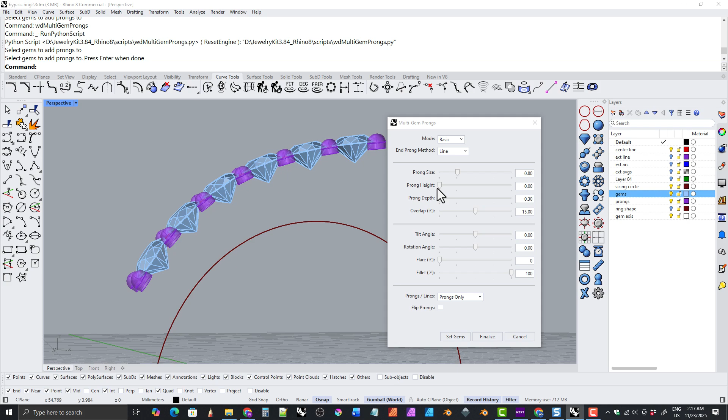Hi everyone, in this video I'm going to show you how to use the Multi-Gem Prong tool that comes with the jewelry kit that I make for Rhino. To open the Multi-Gem Prong tool, you click on its icon right here.

The Multi-Gem Prong window has four main sections. The top section, which has the mode and end prong method, which I'll go over later in the video. The second section, which I consider to have the main settings that you'll use almost every time that you use the tool. The third section, which has settings that you will probably use only occasionally.

And then the fourth section, which is kind of a miscellaneous section. It has settings like the prong/lines dropdown and the flip prongs checkbox. And we'll be going over all of these in the video, of course.

The Multi-Gem Prong tool has three modes: basic, tapered, and list. The only difference between these three modes is the size control. The basic mode has a single slider to control the prong sizes. The tapered mode has two sliders, one for the start size and one for the end size.

And then the list mode has a text box where you can enter a list of prong sizes. The tapered and list modes are only available in the Pro version of the kit. We'll go over all the settings in basic mode and then look at tapered and list afterward. First, we'll click on the icon to open the Multi-Gem Prongs tool window.

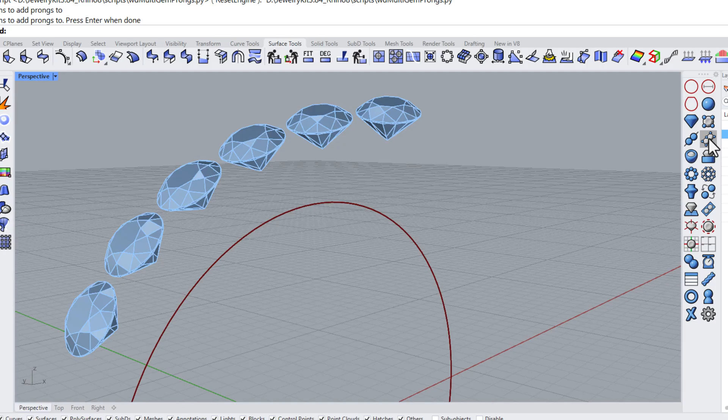Then we'll click on the Set Gems button and select the gems that we would like to apply the prongs to, and then press enter. I usually like to set the height first, so I'll rotate the gems so I can see one of the gems kind of from the side view, and then I'll adjust the height with the prong height slider.

You can set the height to whatever you want, but it kind of depends on what you're doing. Are you making a model for rendering, or are you making a model for production? So you'll make shorter prongs if you're making them for the render, but you would make taller prongs if you're making the model for production.

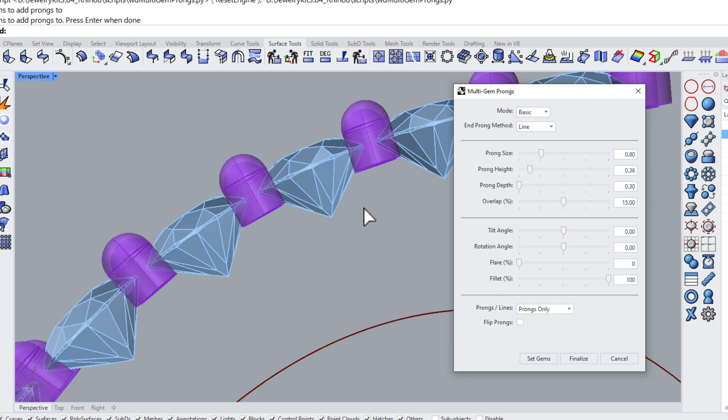And if you're making it for production, I usually like to set the height so that the base of the rounded cap is level with the top of the gemstone. However, how tall you make the prongs is really up to the preference of the jeweler who will be setting the gems. Then we can adjust the other settings.

For instance, we can adjust the depth with the depth slider. We can adjust the size with the size slider. And we can adjust the amount of overlap with the overlap slider. Now we'll look at the other settings, the ones in the third section of the window.

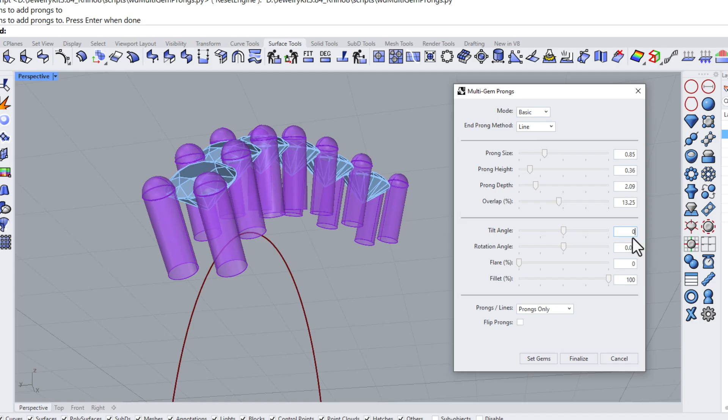So this is the tilt angle. And this is the rotation angle. This is flare. And then finally, you can adjust the fillet.

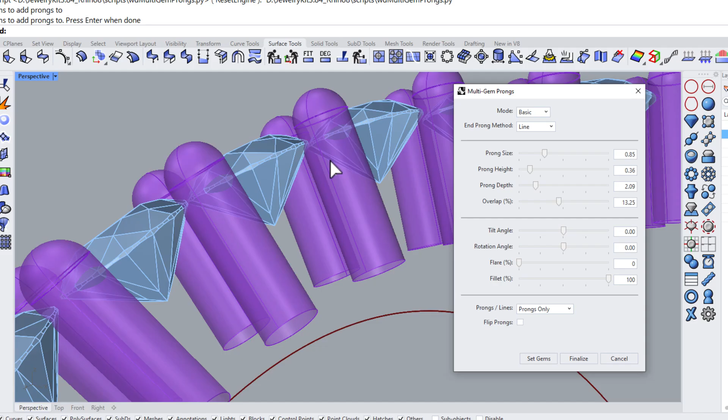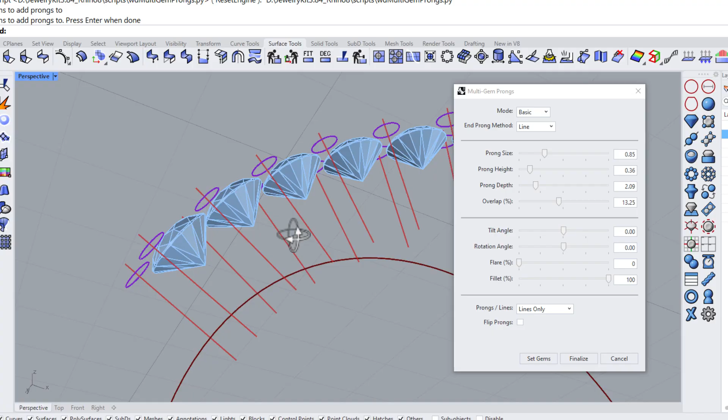Then in the last section, we have the prong/lines dropdown. You can choose from prongs only, prongs and lines, or lines only. You would use the lines typically if you were wanting to make some kind of custom prongs, like maybe you want square prongs instead of round prongs. And you can use the lines to create those custom prongs.

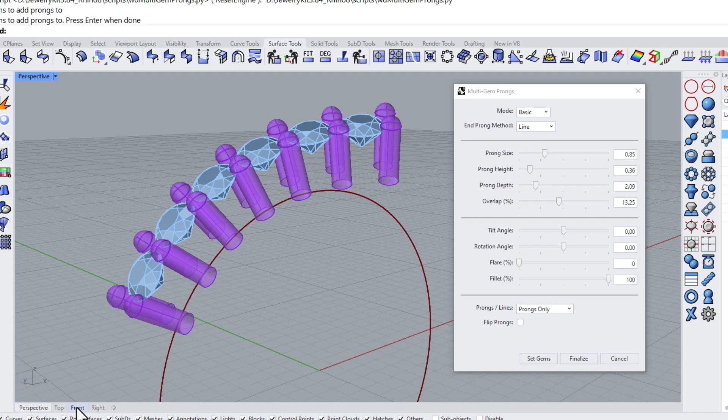And then finally we have the flip prong setting, and that is if the prongs are upside down for some reason, you can use flip prongs to turn them right side up. Finally, the last setting we need to look at is the end prong method. So by default, it's going to be set to line, which is what you're seeing right now. And you're usually either going to use line or arc.

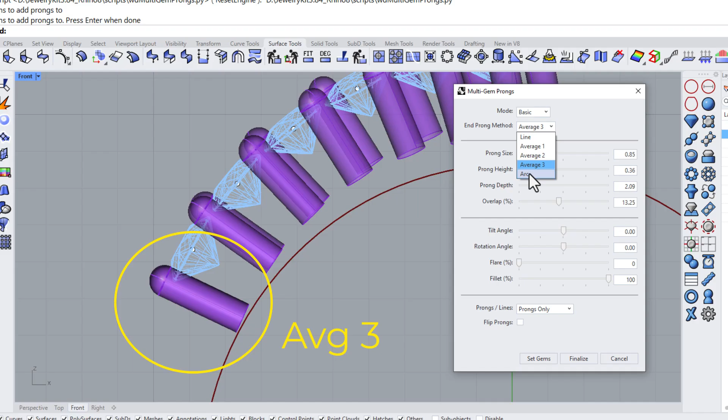And so this is what arc looks like. But there are also three averages, which are averages between those two extremes. And you can choose any one of them that best fits your project. And it is possible that none of them will quite work for you, and you'll have to pick the one that's closest to what you need and then make manual adjustments to some of the prongs afterward.

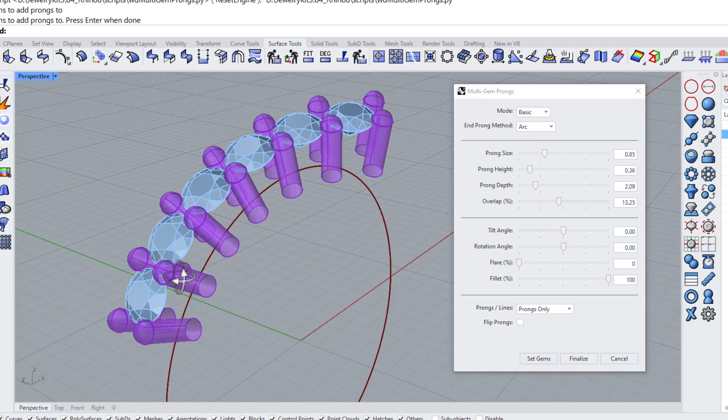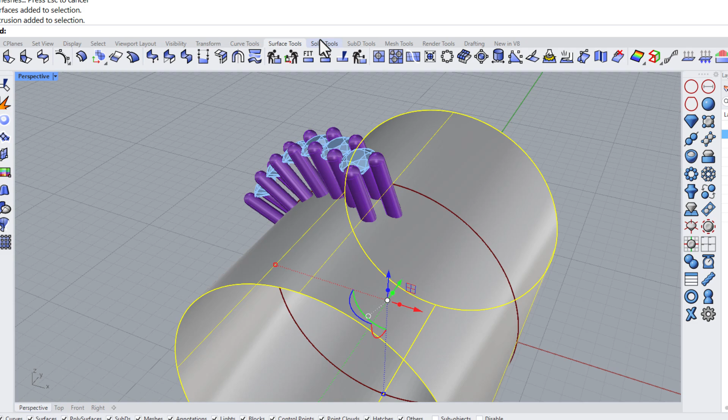I'm just going to adjust the depth of the prongs a little bit more so that the bottoms of the prongs are inside the sizing circle. Now once you're happy with the prongs, you can go ahead and click on Finalize. And then I'll just trim these with the sizing circle. All right, so there are our finished prongs. Now we'll take a look at tapered and list.

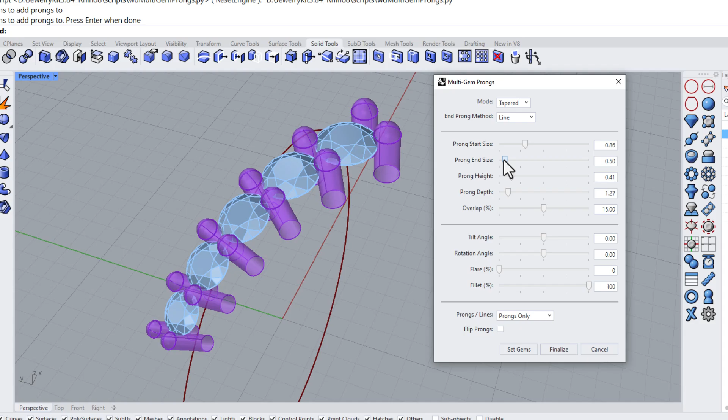So if you have tapered gems, you'll probably want to set the mode to tapered, and that will give you two sliders to control the size of the prongs, one for the start size and one for the end size. And you can adjust those until you get them like you want. And then click Finalize, and now we have tapered prongs for our tapered gems.

If you use the list mode to make the gems, you might want to use the list mode to make the prongs. So here we'll set it to list, and then we'll create a list of prong sizes. I'm using 0.8, 0.8, 0.8, and then 0.7. And remember that the final prong size will repeat all the way until the last gem is reached. So the 0.7 will repeat over the last few gems.

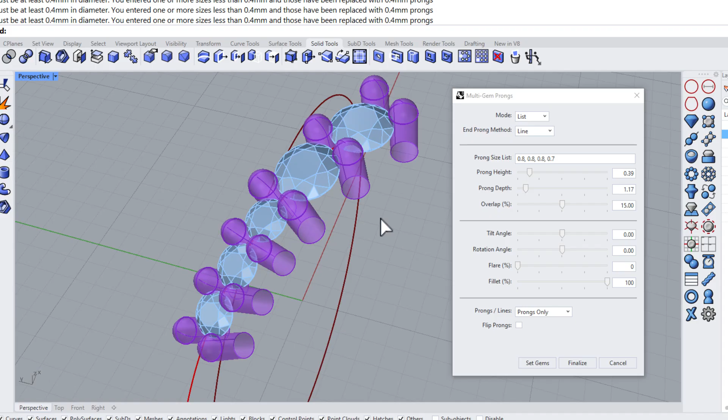Again, once you're happy with it, click Finalize, and now we have the prongs for our list of gems. To be clear, just because you used list mode to create the gems doesn't mean you have to use list mode to create the prongs.

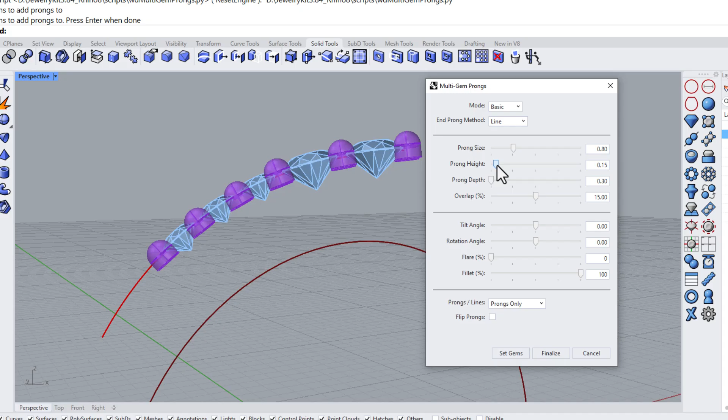So here I'm taking the same gems and I'm creating the prongs again, but this time I'm using the basic mode, and I'm just going to set a size that will work for all the gems. So 0.8 will probably work for all the gems, and we'll go ahead and finalize that. So we could do this as well, but you may prefer to use list mode in some cases.

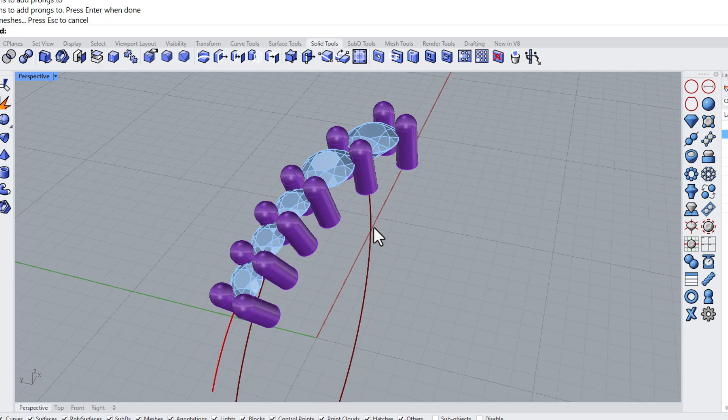All right, and that is how you use the Multi-Gem Prong tool that comes with the jewelry kit that I make for Rhino.